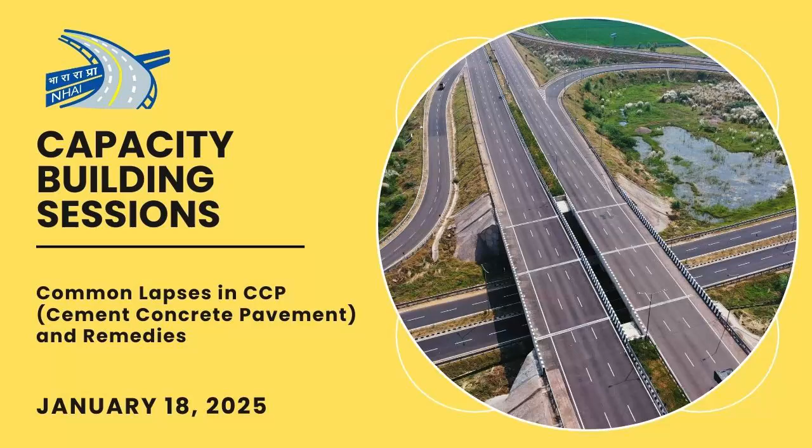This is a lecture which I framed after traveling across the country. I found some very small mistakes are being committed, and their cumulative effect, their compounding effect, is too much, so that we get a bad road.

This is a sentence I framed in 2019. IRC had a seminar on concrete roads, and before that I framed this sentence: India paves concrete ways for prosperity. I think everybody will like it.

This is a sentence written on the Highway Research Station Madras entrance. I went there in 1994 to deliver a lecture. This Highway Research Station Madras is in Guindy. This was a beautiful sentence, so I copied it.

The search for truth is in one way hard and in another way easy, for it is evident that no one can master it fully or miss it wholly. But each adds a little bit to our knowledge of nature, or we can say roads, and from all the facts assembled there arises a certain grandeur, bhavyata. So neither is each one of us an expert, nor is it that we do not know anything. It is a cumulative effect which makes a project deliverable.

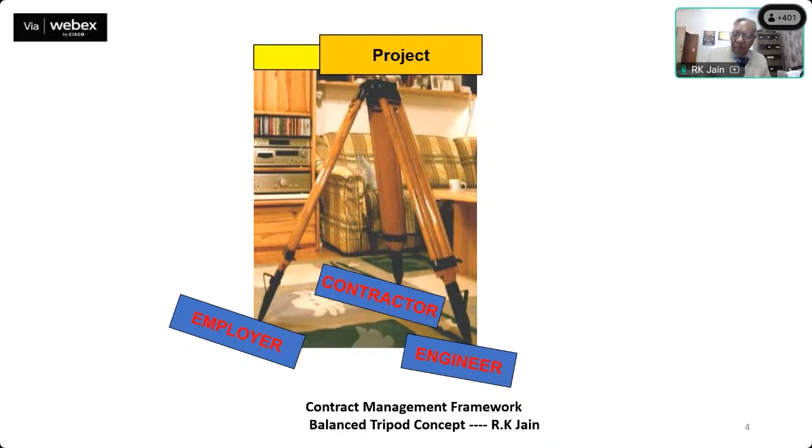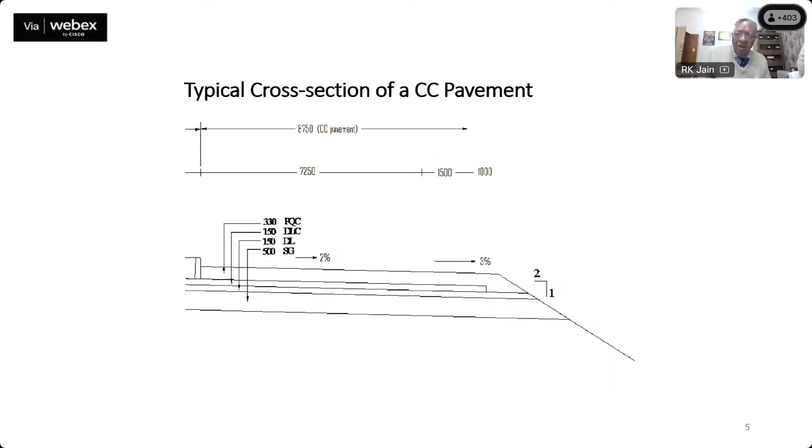See, construction of a CC pavement is construction sensitive. Utmost care has to be taken in the very beginning.

Let me add a sentence from my guru, late Dr. Raymond Sharp from UK. He used to come for the first project, Delhi Mathura Road. He used to say, Mr. Jain, this concrete pavement is like a sophisticated English lady. If you care for her in the beginning, she will serve you your whole life. Otherwise, you will serve her your whole life, meaning thereby that there will be problems and problems. So in the very beginning itself, we have to be very careful.

I attended the Chicago conference. I was sent by IRC. I was co-convener of the Rigid Pavement Committee, Mr. B.K. Sinha was the convener. Both of us were deputed to attend this LLCP, Long Life Concrete Pavement Chicago Conference, 25th to 27th October 2006. This is a sentence I picked up from one of the papers.

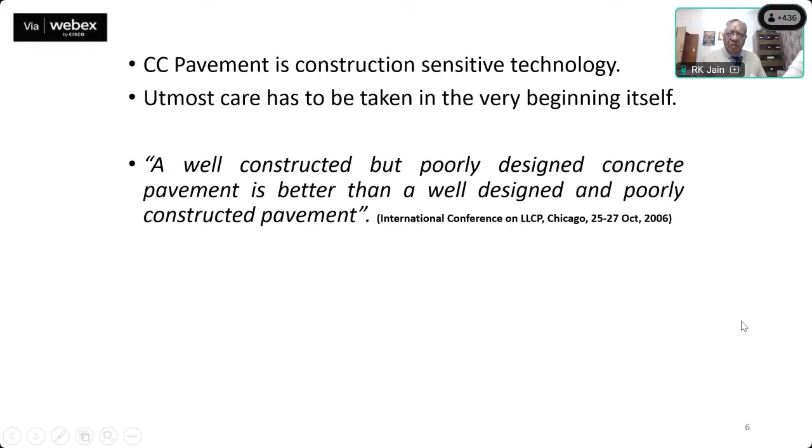This is the first lapse. Prior to that, I'll show you in another slide where do we falter. It will come.

I have seen so many designer designs say 300 thick. It should be built 310, because its life is 30 years, and I have quoted those paras. The thickness has to be increased by 10 because we have to do 2 times retexturing and then grinding to rectify the faulting during the service life.

What is faulting? Between the two slabs, there is a difference of level of more than 4mm or above. That is faulting in our country. In some countries they take it as 3, but when I wrote the specification, I decided to have 4, and that is okay.

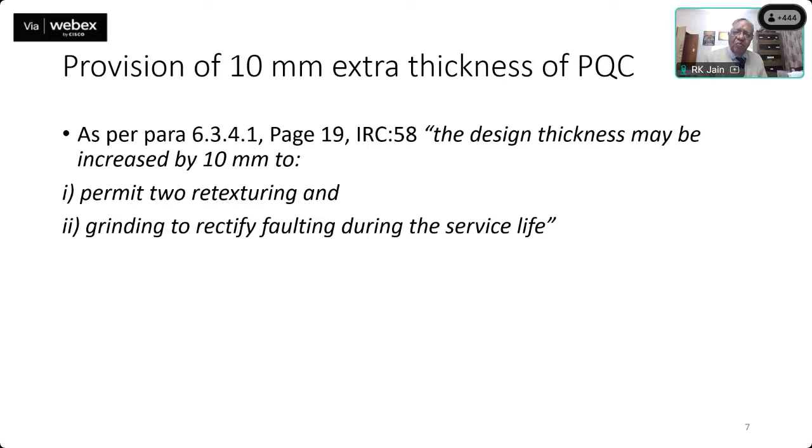Now, you see any foreign photo, you will find that all the dowel bars, all the bars in CRCP or in JPCP, the iron rods are coated with anti-corrosive coating.

This is IS 13620. It is to be applied on each dowel bar and tie bar. The provision has been made by me in IRC 15, 2017. Believe me, nobody is complying with it. Nobody is making compliance of this requirement.

Result is, we cannot prevent the entry of water through the joints or elsewhere. It will reach definitely these tie bars, and also sometimes dowel bars. You will find, if you see a photograph in IRC SP 83, I have put in a photograph from a Bihar project of NHAI. The dowel bars are all rusted, they are bent.

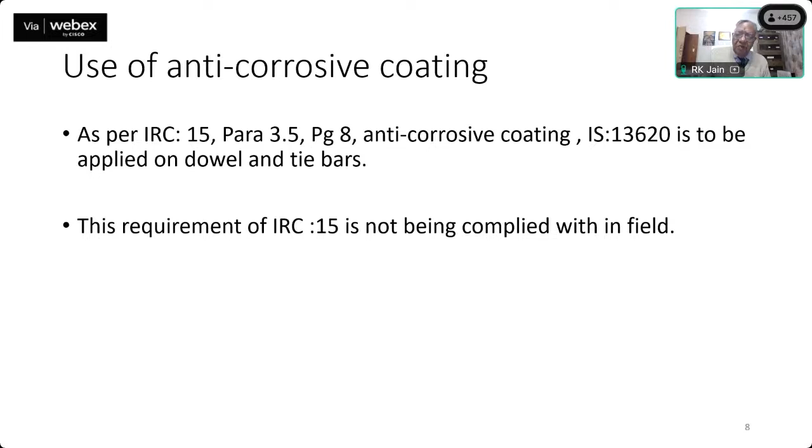We are using plasticizer when we are constructing the road to gain good workability.

While on this subject, let me define what is the role of plasticizer. The role of plasticizer is to impart the same type of charge, say positive, to each grain of cement. And when the two grains are charged with the same type, say positive, by process of mutual repulsion, we get good workability. Not by adding water, but by this.

So what should we do? It should remain constantly in an agitated state so that it is always in suspension in the water. And I have seen at many places it is not being complied with.

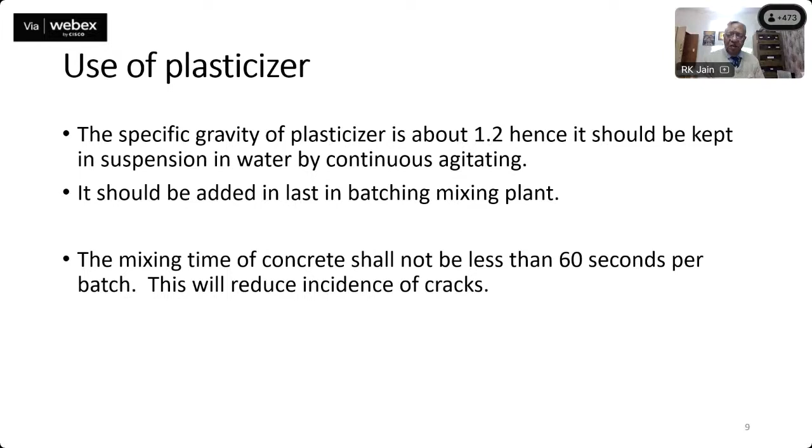Next. This I added purposely, since some of my friends will be working in hilly areas, we call it ghat. This was a very serious problem with NHAI, the ministry. This Shiradi Ghat is NH 75, old NH 48, from kilometer 237 to kilometer 263.

Mr. Oscar Fernandes, in the last UPA government, was the minister in charge, and this road happened to be in his constituency. He had a meeting of 20 persons, and in the second meeting he walked up to me with folded hands and said, Jain Sahab, I have been told you can do something. I said, okay sir, why not? Myself and Dr. Pandey, to cut the matter short, visited the site and this road was produced.

Now you see a big mobile tent. It had two functions. Will you believe, one night we paved under the tent because we had very much time constraint - only monsoon was given to us.

When you are constructing a road, the IRC 15 and other specifications provide that wind velocity should not be more than 15 km per hour. Wind is in the hands of God, not in our hand. So what do you do? Take canvas, put it about 5-10 meters away on both sides of the paver. It will cut off the speed of the wind, and there will not be undesired cracks. I will show you when we proceed how that wind affects and how we can prevent it.

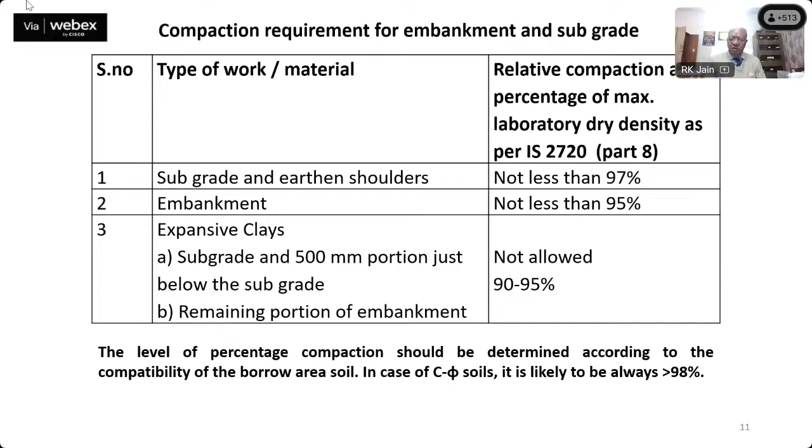So I have spent about 5 minutes on this. Kindly stick to it, and tell your AEs and EEs not to put the peg on 97% or 95% for a man. Okay, next.

The main reason why concrete cracks is improper mix design and jointing practice. Jointing practice, you delay it. The cracking is related to the inherent character of concrete - it will crack when it changes volumetrically due to moisture and thermal effects. This lower sentence is from Dr. Raymond Sharp itself: the incidence of cracks can be minimized by improving the mix design and jointing practices, with timely saw cutting and properly managed curing.

This is as such. The lower portion: there is no reason a concrete road should not serve the whole design life if cared for earnestly from design to maintenance.

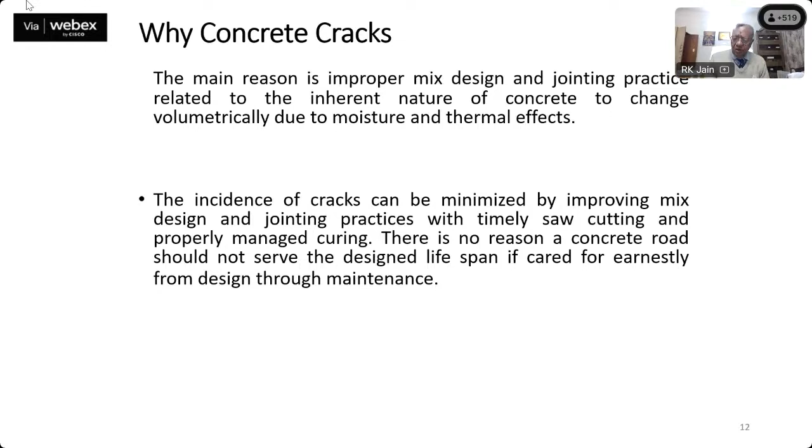So till now, it is very much relevant that our mix design should be done properly, and most importantly, the cracks, the joints - when we are making the joints, we do the initial cutting. That should be timely, otherwise it is going to be a troublesome situation.

This is from IRC SP 83. While on the subject, let me tell you, I had two lessons from Dr. Dan G. Zollinger, Texas A&M University in College Station, Texas. I was sent there through Federal Highway, on the recommendation of Federal Highway, and he taught me all this. Then he was preparing some literature for Federal Highway. I requested, and in two months I got two CDs developed from them, and then wrote this IRC SP 83, which is used so vitally in the country. Of course, I was not alone - there was a team in IRC, but I was heading that.

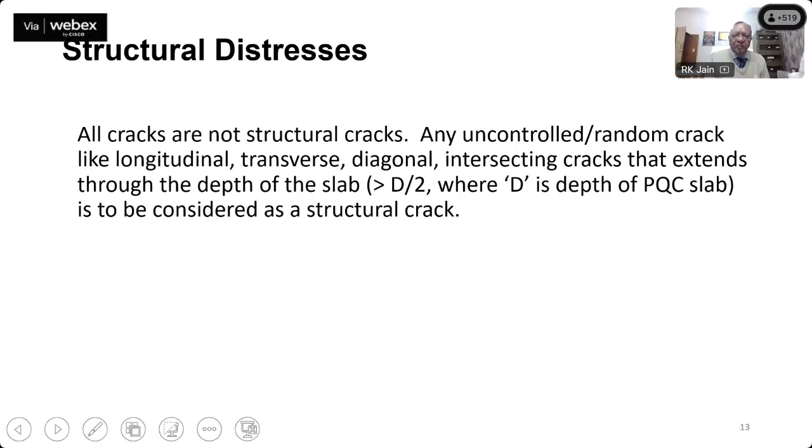This I have picked up from chapter 3 of this. There are 3 types of cracks which are prominent. Excessive drying shrinkage - how does it happen? We leave the pavement naked to sun rays, the water gets evaporated, and this drying shrinkage happens. So this is one thing.

See the loss of subgrade support - that means the disease we are suffering from, which I explained in the previous slide, subgrade and embankment are not compacted to the compactable density. Then vibrator trails caused by malfunctioning or improper adjustment of vibrators on the machine.

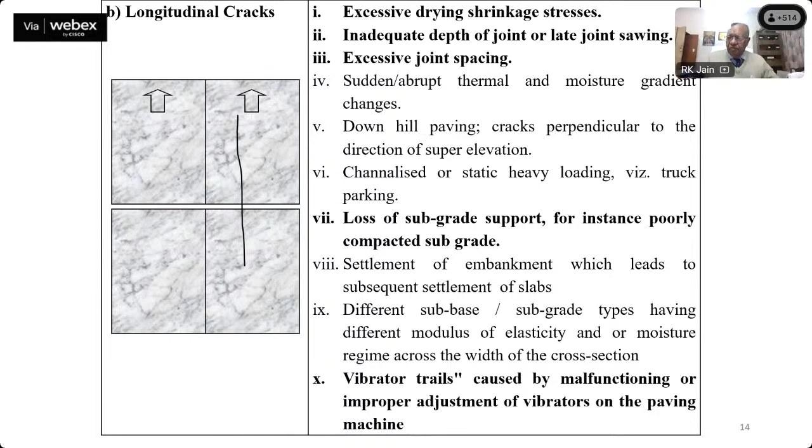Transverse cracks - same, excessive because of evaporation of surface water from the concrete. Inadequate depth: the depth for transverse is 1/3 to 1/4 of the pavement thickness. Then late initial joint groove cutting, excessive joint spacing - the ratio between length and breadth should not be more than 1.5.

For unreinforced slab, then misaligned, corroded, locked bars, dowel bars - I'll explain by figures - crack at the end of dowel bar or locking of dowel bars. Defects, delays or interruptions of...

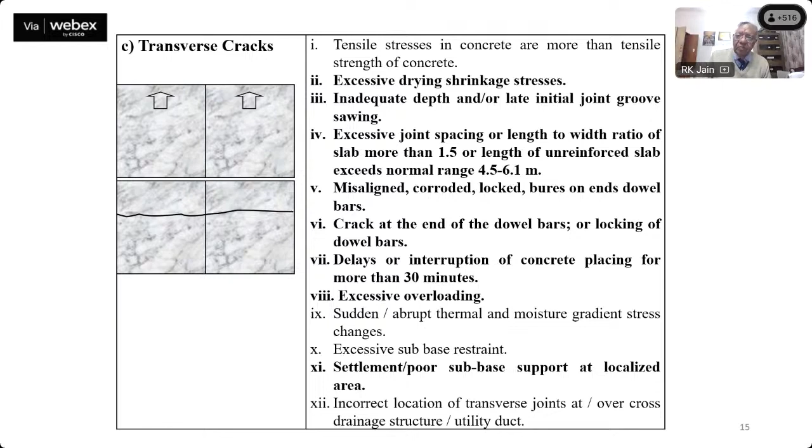Settlement - same, poor subgrade, subbase support. Diagonal cracks, they are also there, but not as much as these longitudinal cracks. Why do these longitudinal cracks happen? Poor subgrade - I'll tell you, when you go to this, I will show by pictures.

Mostly in the wheel path, and certainly in the slow lane, that is the truck lane, beside the shoulder joint, at a distance of 0.9 to 1.2 meters, that is in the wheel path, you will find a parallel crack. There are two reasons: the initial cut in the shoulder joint has not been up to 1/3 of the depth - it is less.

Government of India constituted a committee, the RK Jain committee, with myself heading it, Mr. Vidur Kant Jha and Shri MC Venkatesa. On NH 12A in Chhattisgarh, we actually saw that the depth of the shoulder joint was nowhere even 1/4, not to talk of 1/3. And the result was - it's a full report. Those who are interested, I can mail it to Jain Saab, PK Jain Saab, and he can circulate it.

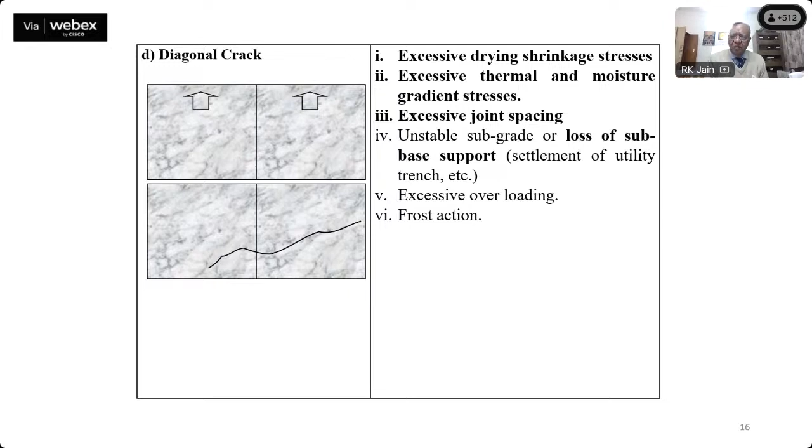Then faulting. What is faulting? Between the two slabs, either in the transverse direction or in the longitudinal direction, there is a settlement of one vis-a-vis the other, 4 millimeter or more than that. That is faulting. This also happens due to less compaction, or sometimes the tree roots also interfere.

When you do a job, give your own numbers. You can put a placard also. Tipper number 2, 3, 4, blah, blah, blah. It is easy because you have to record the slump when the tipper starts and the slump when it is discharged in front of the paver. So many places this is not being adhered to. In fact, the gentleman at the supervision site does not know the importance of it.

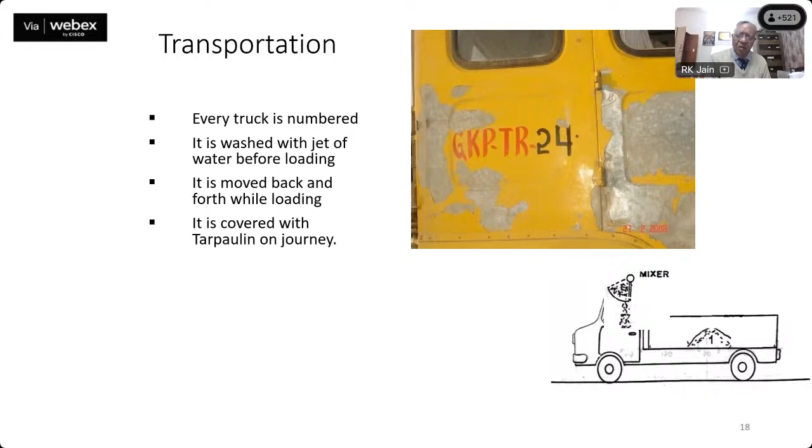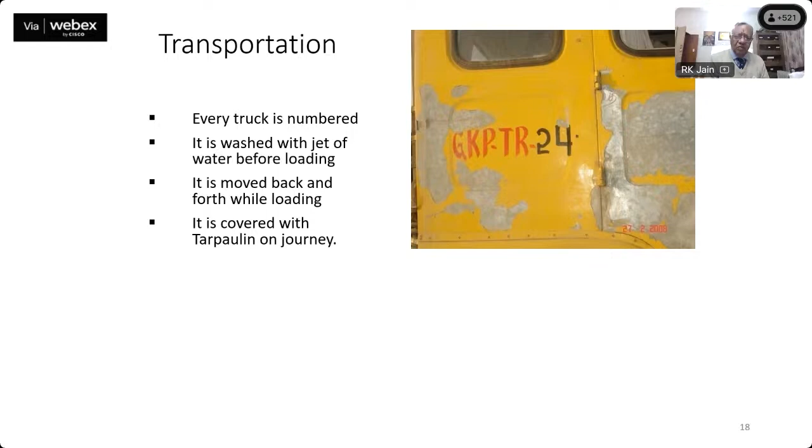We take the concrete without covering it with tarpaulin. The moisture is lost, and the concrete in the upper layer is not the same as the concrete in the lower layer of the truck. So this must be covered with tarpaulin. Very small requirement.

DLC surface we must examine. This is from a project I don't want to name. It is not closed. What will happen? When you put polythene over it, the polythene will acquire the contours of this DLC, which is before us. It is not a closed surface. What do we do? I devised a very simple technique. I'll show in the next.

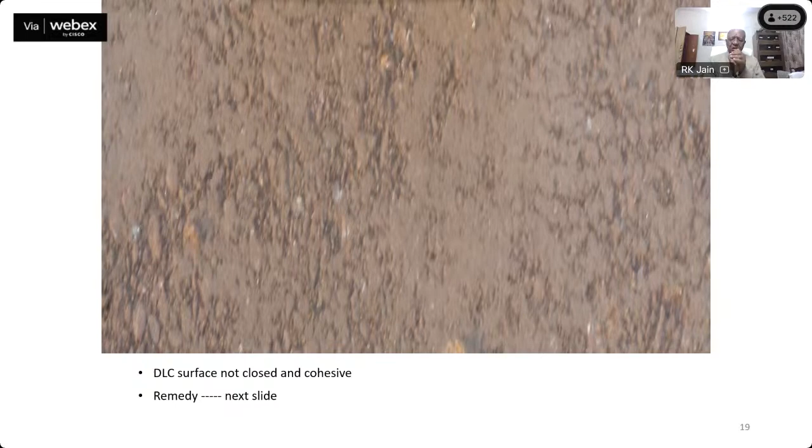Let us not forget, if the DLC is smooth, the concrete pavement will slide over it with the introduction of polythene, of course, in cyclic change of temperature and in daily change of temperature.

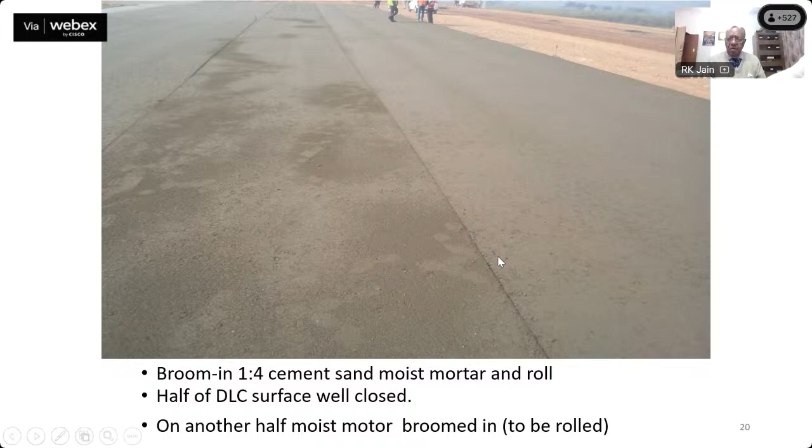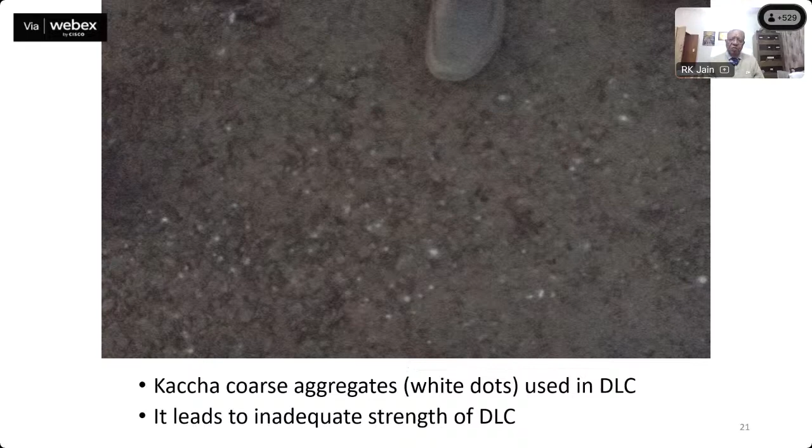Coarse aggregate white dots used in DLC. The strength of DLC was found to be less. Now see these dowel bars. There are two very important observations.

Dowel bar is cut out of a big long MS bar. Cut, tuck, tuck, tuck, tuck, tuck. There is a machine outside. If you examine the end, which has been freshly cut, you will find burrs, very small iron particles. They will be protruding along the periphery. If you put your hand, it will be cut and will bleed. So, a grinding machine should be set up at the site and these should be ground. I just want to know how many of us adhere to it. This is a very simple precaution.

And now see these dowel bars. This is here, two-thirds of it is covered, two-thirds. And in some bars, this sleeve is through, and both ends of the bar are visible. Not desirable. The end has to be closed, one end. But this is a real photo. There are so many bars in it which have the sleeve slipped to inside, and both ends are naked. And no removal of burrs. Burrs, B-U-R-R-S, burrs.

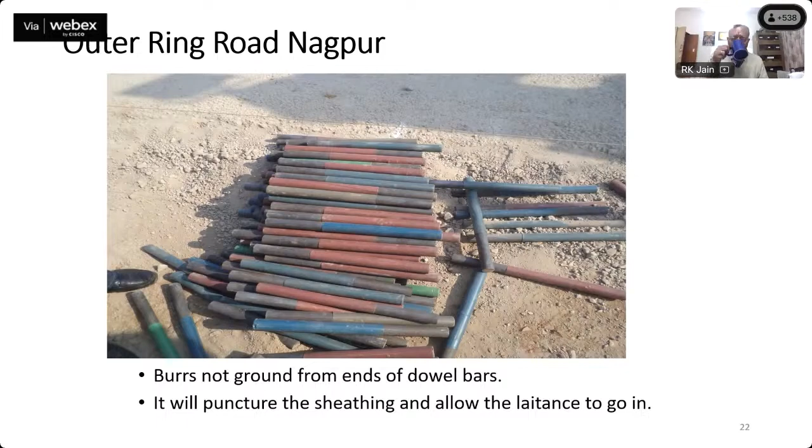Next. So what do we do?

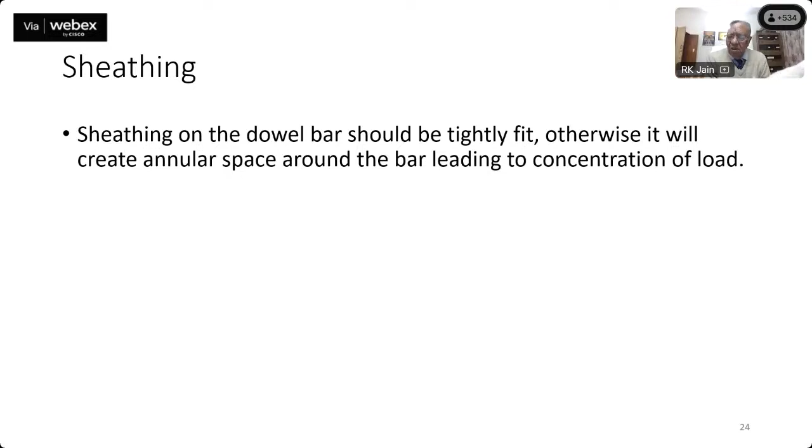Next meter. When you see, Chairman Sir was saying that it was smooth, how does it happen?

Very simple technique. You take a 3-meter straightedge, which is now 4 meter. Half of it should be put on the previous day's concrete, and the second half on the approach slab, on the approach panel, which has just been finished by slip form paver.

If there is too much difference in level, this can be corrected in the green concrete, in the nascent concrete. Once it hardens, we cannot do it.

Okay, so this is it. I hope this will improve the riding quality. The road which was shown by Honorable Chairman Sir, near Dwarka in Gujarat, this had been ensured, and there was no tuck at the joint.

Because transverse joints are only 8 to 10 mm. And when we were deciding the specifications of Delhi Mathura Road, we decided for 8 mm because the wheel will bridge over it easily, it will go without knowing. Okay.

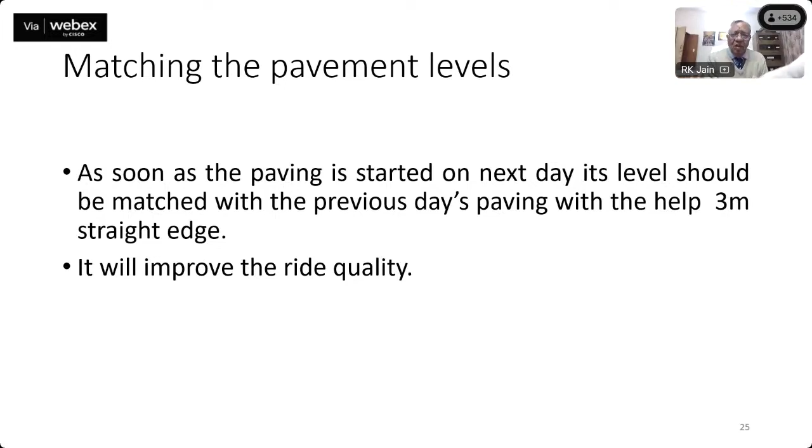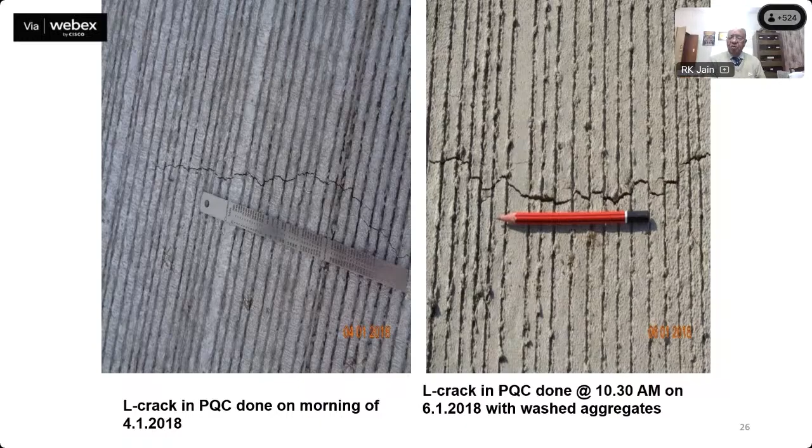I thought it is heat of hydration, they could not manage. So I got the paving stopped, and this is not it. Which one is this one?

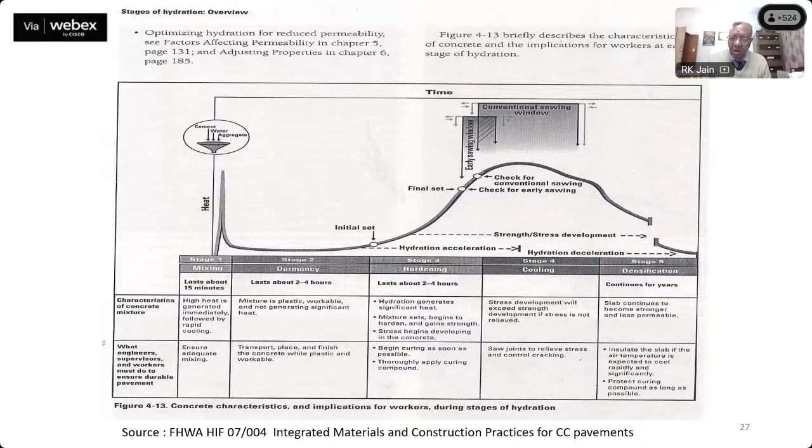Because it will not allow the internal water to be carried away by sun rays. This is done within 1.5 to 2 hours of laying.

This is done just after, or just at the terminal end of completion of initial setting time. This is it.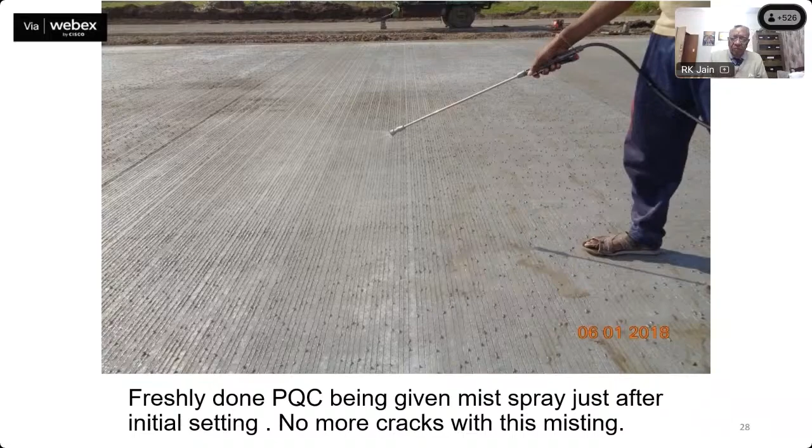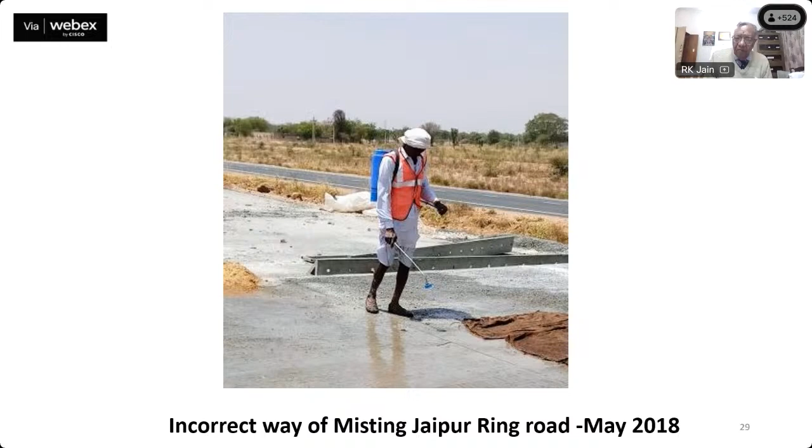This is an incorrect way because it should not be held. It should not face the concrete pavement. It should face the sky, just like this, because the water globules will break further and we will make a good mist.

This was done in May 2018. See, it is giving a sort of cover also on the PQC.

This is Samruddhi Expressway from Bombay to Nagpur. On package 3, I think I was called. It is just before Corona.

So we got a fogger design. One gentleman in Pune, he designs foggers. So I applied this technique there, and the report was that the cracks were reduced by 85 to 90%. Mr. Mayank was the PD, not he was PD of the contractor.

This fogger is working. Just see, this is going on to the road.

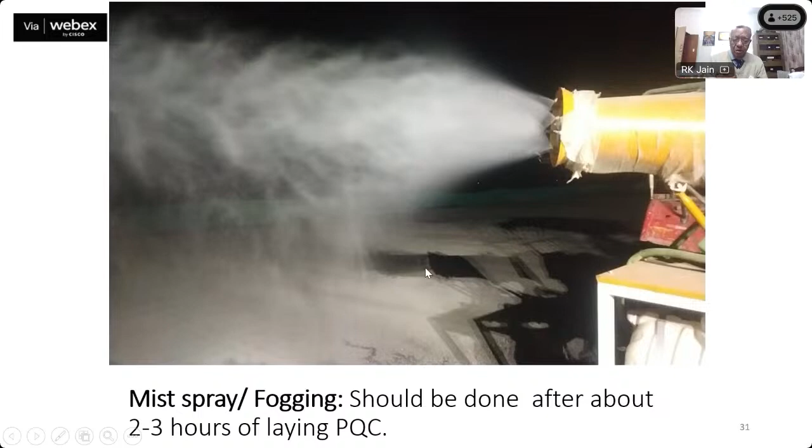We do the curing by sprinkler. It saves water, and after 2 hours or 3 hours. But see, most of them, this is poorly covered. Let's see where the cursor is there.

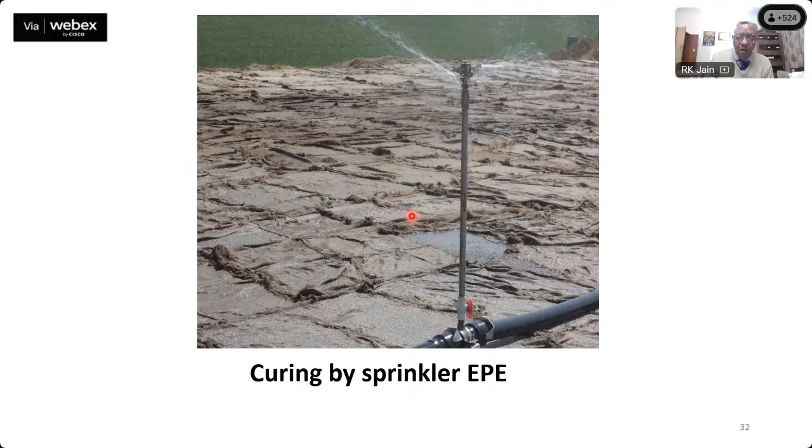This is a road leading to Hajo, old NH31, and this is beyond. You see, this crack is 0.9 to 0.92, mostly in the wheel path. This is beyond Hajo, old NH31.

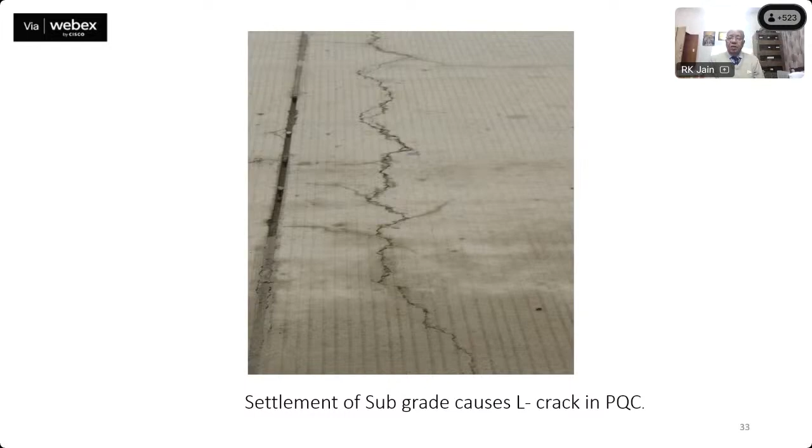What is the reason for settlement? When you see along the shoulder side, it has settled, and the shoulder joint has widened.

What is the remedy? The immediate remedy is to grind the raised portion of the PQC. This will last for 5-6 years. Ultimately, we have to mill the existing concrete, fix new material, and make up the level by micro concreting.

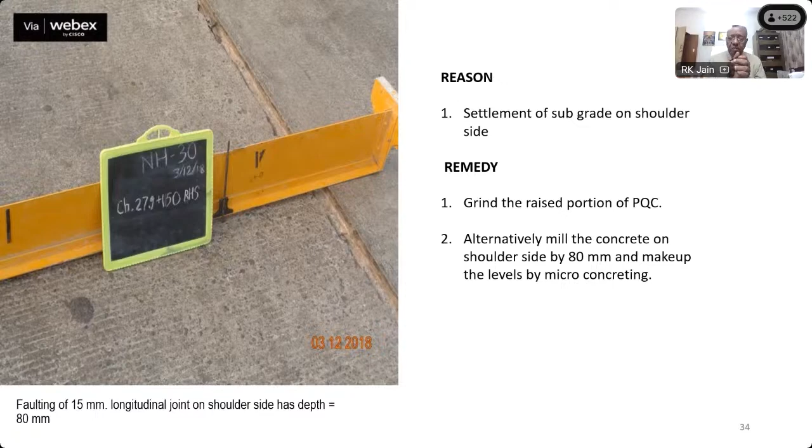Next, a very small crack, known as not even minor, 0.2 to 0.5 millimeter. This is from Lucknow. This package was near Lucknow.

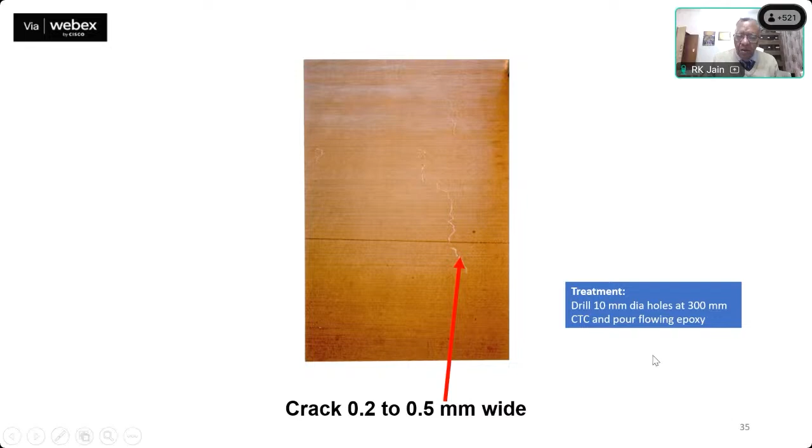Now this is from an L&T project near Balesar. This is also 0.2 to 0.5. The gentleman at the side said remove it, I said no, I was there in the DRB, this can be corrected. We just poured flowing epoxy and poured some sand over it. It is okay, still doing fine.

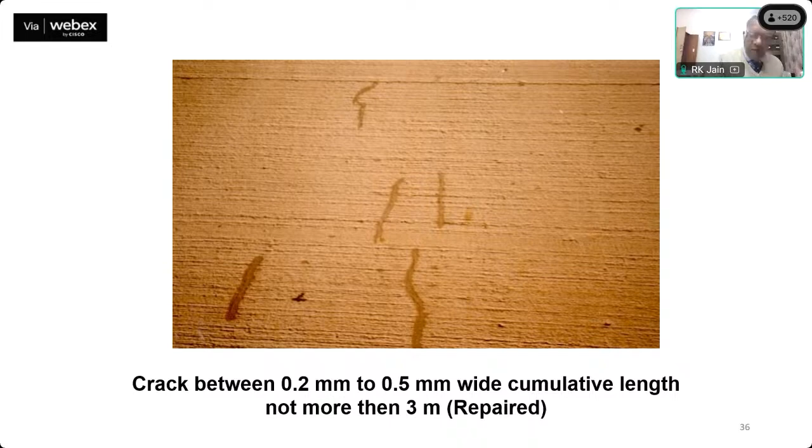This is near a sea, about maybe 5-6 kilometers away. I don't know exactly, but all these cracks are perpendicular to the direction of the wind. I submitted in the beginning that wind velocity has to be brought under control. This was not done here. Mind it, near the sea, the wind is very fast, its velocity is quite high.

So had the gentleman put in two barriers to kill the wind velocity, this situation would not have arisen. Fortunately, these cracks were small, and they were filled with flowing epoxy. I had seen this road in 2005-6 and happened to travel on it in 2016 also. They are intact as such. They look ugly but have not penetrated. So this minor precaution could have avoided this ugly scene.

This is near Daula Kuan. So many people must have traveled near Daula Kuan. You find some panels were black in color, scaling had happened. They approached me. Since the advice was free, nobody attended to it. I got a gentleman from the store and got it done. It is 1:6 epoxy sand mortar that was spread. It has lasted more than 10 years.

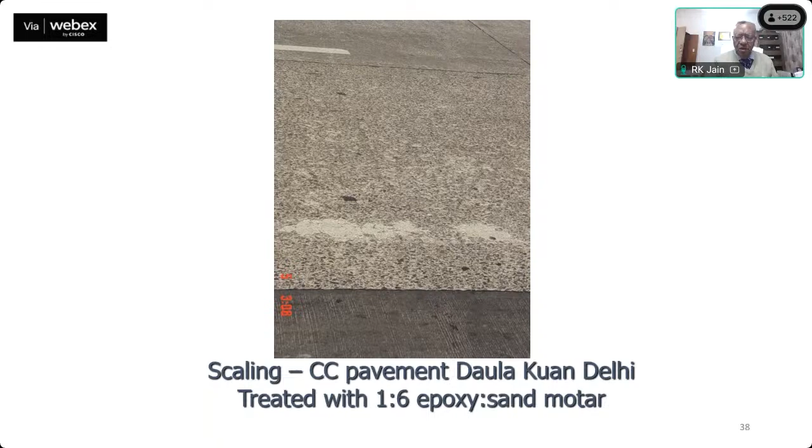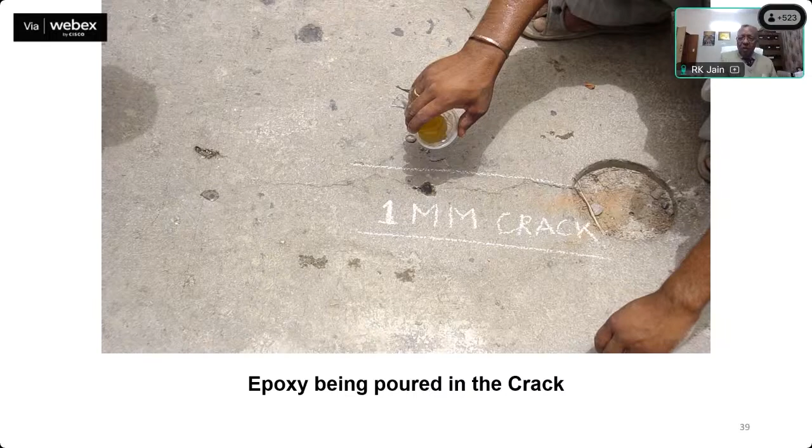In IRC 83, that is why we have seen a scale given from 1 to 5. Up to this level, do not do anything, let them stay. Similarly, these are 2 mm cracks at a 300 mm spacing.

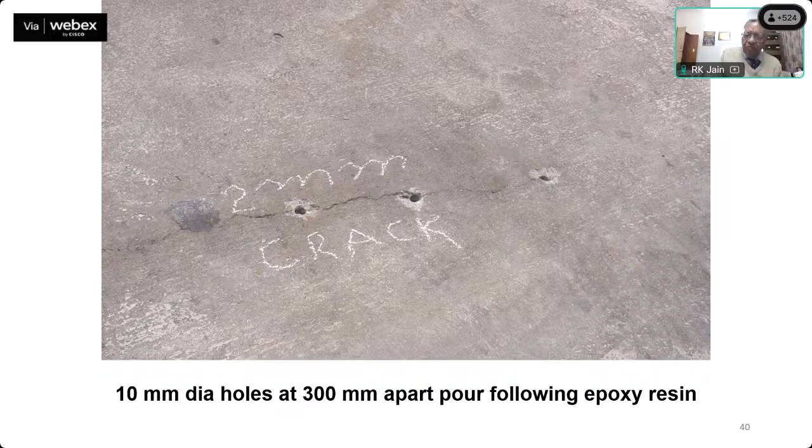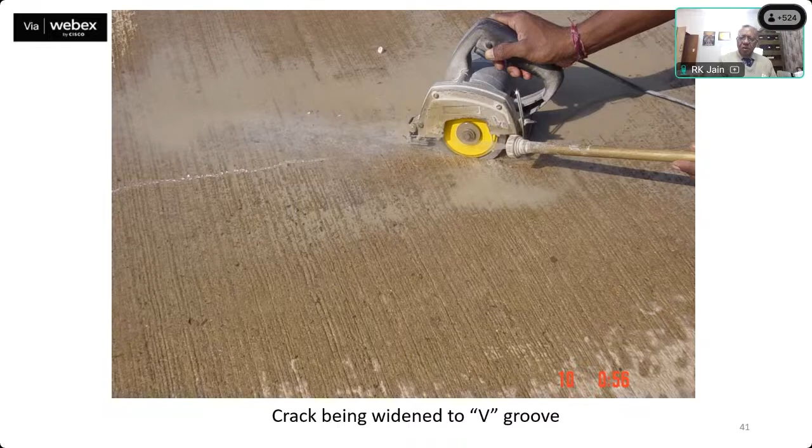People go on rejecting just for no reason. This is there, I got it done in my presence. This was a crack, make a V-groove and pour the epoxy. It will work, let's see. I am doing it with my own hand.

This is a serious problem, being neglected by field people because of lack of knowledge, with due regards to the AE. It happened with me also when I constructed this Delhi Mathura road, in a length of 0.5 kilometer. Only construction traffic when it was turned, the sealant came out, as seen here. This is package 2, Kanpur.

I was worried, so I brought a sandpaper 80 number, rubbed it, took out all the dust with the help of a bicycle pump, and then saw the instructions on the container, applied the curing, applied the priming coat. The period is half an hour to 1.5 hours, depending upon the ambient temperature.

I poured this polysulfide. Polysulfide is in 2 grades, pouring grade and gun grade. We had the pouring grade. This is of Kanpur, NHDP Kanpur, package 2. I told the contractor, why do you do this? But as I said, no. Then when it came out, he said, sir, what do I do? Now open heart surgery, what can you do? Remove it. All were removed and then sandpapered or sandblasted and redone.

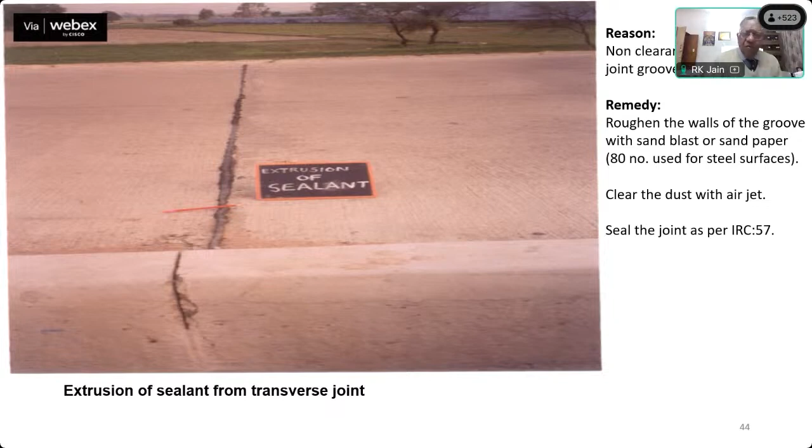This is a partial depth repair, just at the beginning of the crack. Late Dr. Sharp and myself, we are seeing it. A 4-inch deep parallel cut was made, debris were removed, the SSD condition was created, and cement concrete with 10 mm down was poured in it, properly cured. Till now, in 30 years, it is standing okay, from the last 30 years.

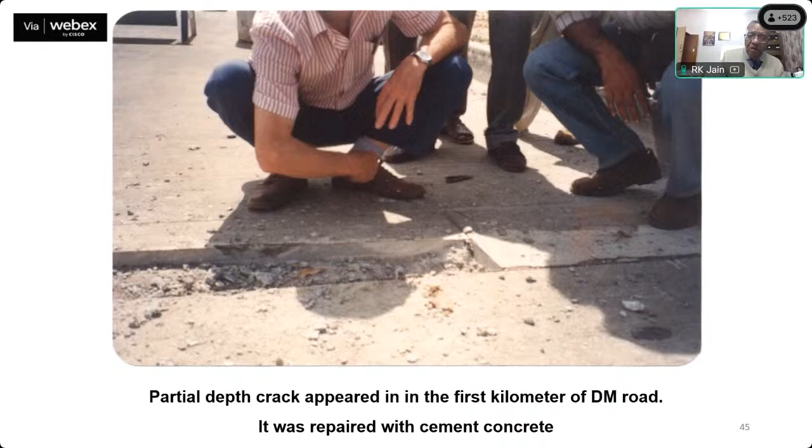There was a place, this is, I think, Delhi Mathura Road, kilometer 49.331, I remember. When it was going to be opened, I saw this crack. I was worried. See, all your consultants will say, remove the whole panel.

No. I preserved it in a width of 1 meter, broke it as shown in this picture, made 2 lines, one outside, and line 1 is deeper than line 2, so that when you break it, the impact is not passed on to the parent concrete.

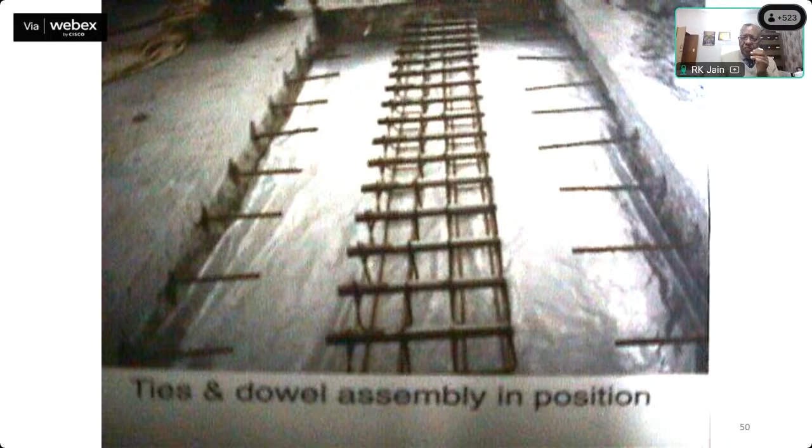And I prepared, let's see, at 300 mm, these holes, epoxy, these tie bars, and another additional transverse joint was created. Ties and dowel bars assembly were put in position, concreted it, and textured it.

30 years gone, now we cannot find out where it is. You see, 49 plus 331. So, because it is written that you must remove it, no, please treat it instead. This is acceptable. What have we done? We have rather done a better job.

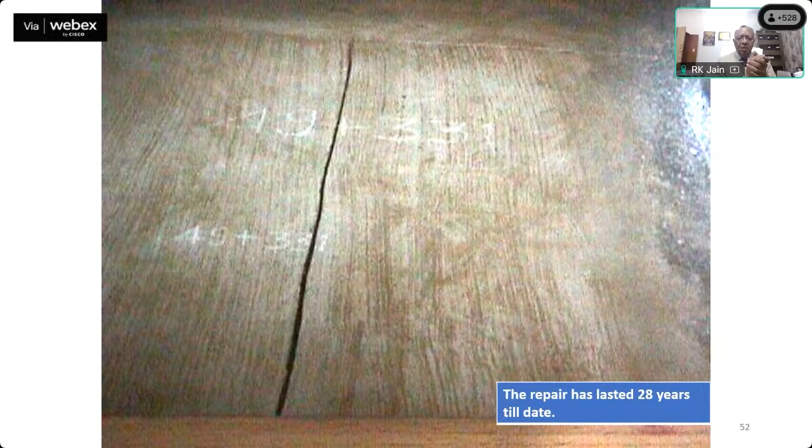This is Kanpur. Again, I was not there, Mr. Satyendra was there. The previous slab has mounted on the next slab by 4 inches. And this was broken, removed, and then manually redone. From the last about 20 years, it is okay. That is it.

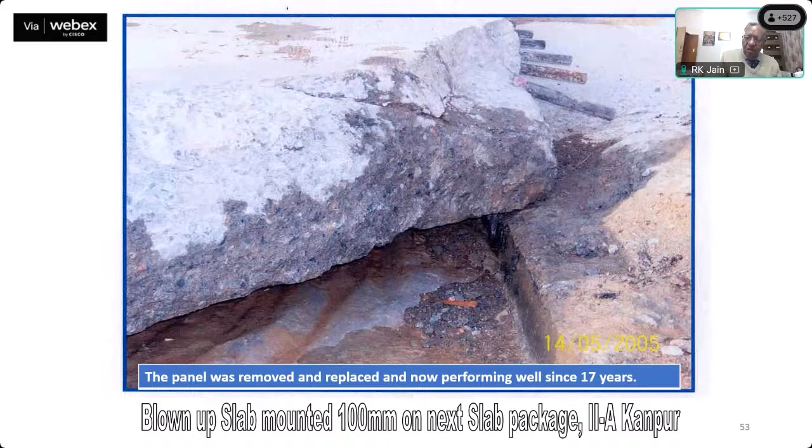Kindly see this, it's a very important picture. This is from one of the very important projects of India. Beautifully done, this sprinkling of curing compound. But see, inadequate depth of tining. What will happen with inadequate depth of tining? What will happen?

After a few years, this tining will be abraded. There will be aquaplaning or hydroplaning. What is it? A thin layer of water between the surface of the tire and surface of the road. When you apply brake, skidding will occur, and there may be multiple accidents.

In this specification, we have given the tine depth not less than 3 mm. But I can say with confidence, gentlemen, when you go to site, measure the tining depth. Nowhere in the country will you find it 3 mm. I am saying it with authenticity because I have seen it on 50 projects. I am not blaming anybody, but the codal provision and the specification must be adhered to. Otherwise, what for do we make them?

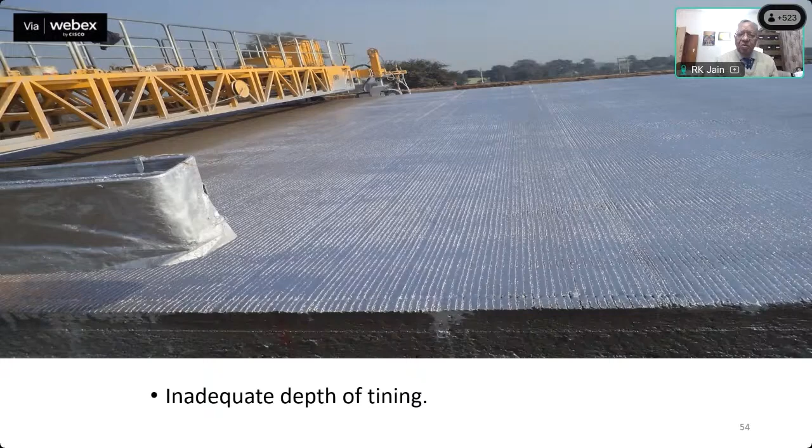This is the instrument with which the depth of tining is measured. How many of us have it at site?

Kindly see, the adequate depth is 3 to 4 mm as per MORTH 602.9.11.1 and IRC 15 para 10 point something.

I am requesting the PDs, you ask your AE to show you the tining depth. Invariably they will go in for sand patch method. Sand patch method, gentlemen, is for texturing, brush texturing, not for tining.

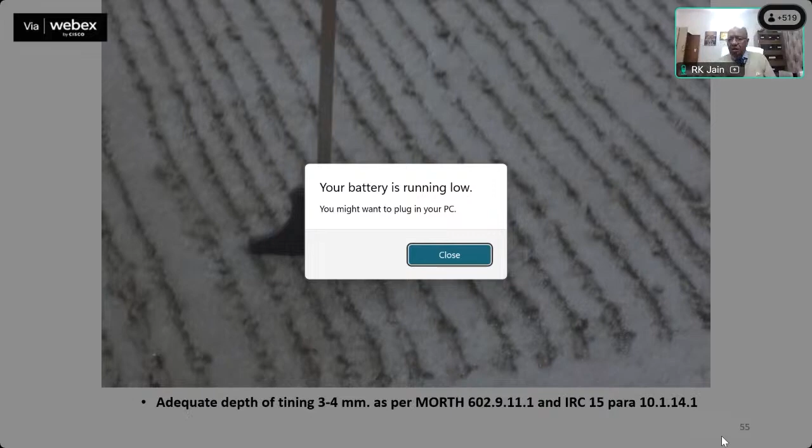Because the sand patch method is: you take 25 grams of standard sand, spread it, and take the diameter at 5 places. 31,000 divided by d square will give the depth of the texture. But nobody bothers. Unfortunate. Now, how many of us have seen it?

This is the same instrument which the tire industry takes for measuring the depth of the grooves. Very important, very small, anywhere you go. I saw it and I got it done. These pins are about 5 inches long.

So at a site I saw, I was not getting 3 millimeter depth. So I took a strip, an iron strip or some 8 mm rod, both sides, tied it with winding wire. These pins were left about 1.5 inches. The lever arm was curtailed, they become stiff, and I got 4 mm.

I again say, you show me any project where this arrangement is not there, you get even 2 mm. It may be quarter to 2, it may be sawa do also, it may be quarter past 2, but nowhere 3.5 mm or 4 mm.

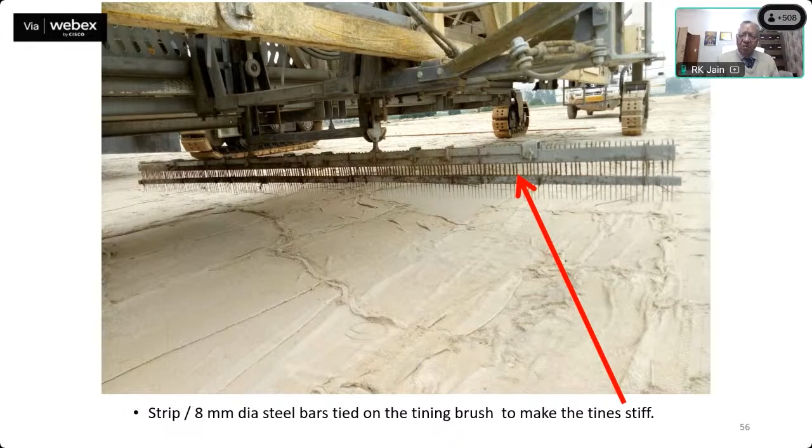Why do we insist upon it? Because it avoids accidents. It prevents skid, it is an anti-skid measure. When you apply brake, the vehicle stops. Otherwise, there are multiple accidents.

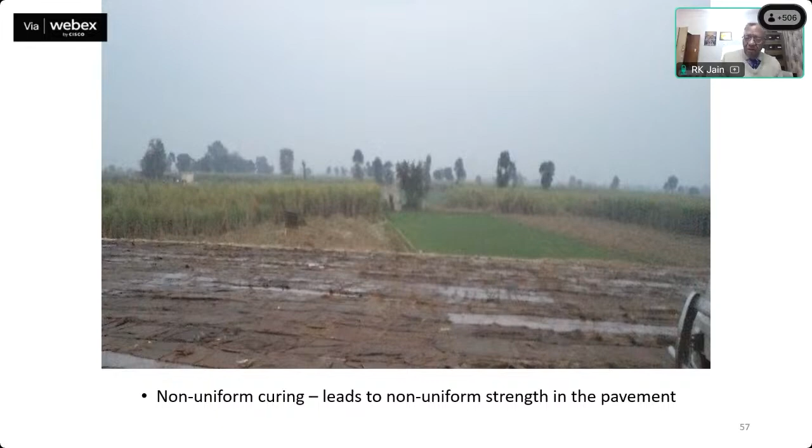Somewhere it is covered, somewhere it is not covered. We have heard of differential settlement; here it is a case of differential curing. Differential curing. Dowel bar misalignment.

I call the gentleman from Germany, MIT scan, a beautiful instrument. It can tell you the position of dowel bar and also of tie bar. Tie bar is not important, dowel bar is important. You see this. In 1 minute, it can do one joint.

And on a project we show, the marking should be with red paint on both sides. At a project, it was only one side. I said, we will measure it again with a tape. And the difference was 90 mm, 90 mm. The dowel bar was not centrally placed.

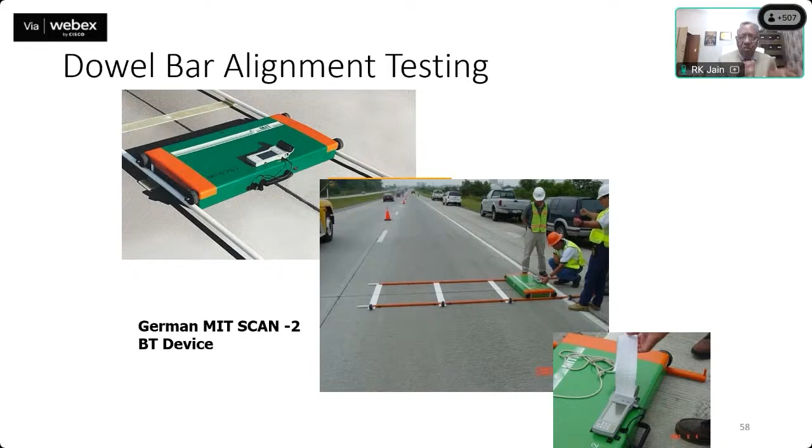I got a phone call from IIT Madras, one of my students of course. Sir, if the slump is more, what will happen to the dowel bar? I said, you take a dowel bar, it is 8 to 10 kilo, see it sinking, it is pushed to mid depth. If it sinks and goes to the bottom side, where is the load transfer?

Your LTE will decrease, load transfer efficiency. That is why we keep the slump 20 to 30, at the most 35. If the slump is more, the dowel bar will sink.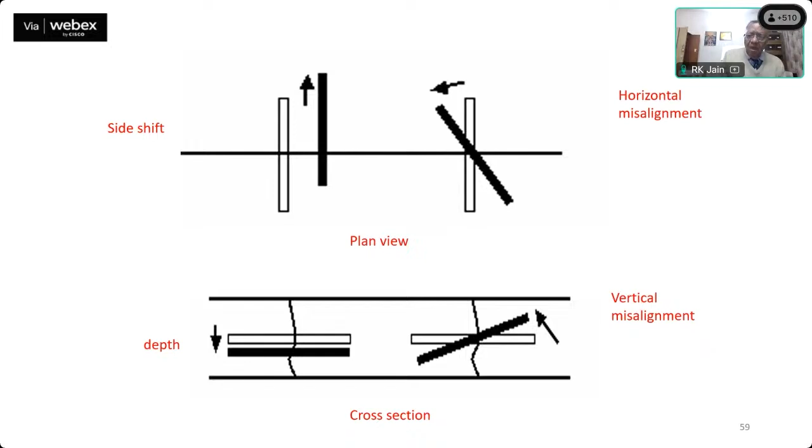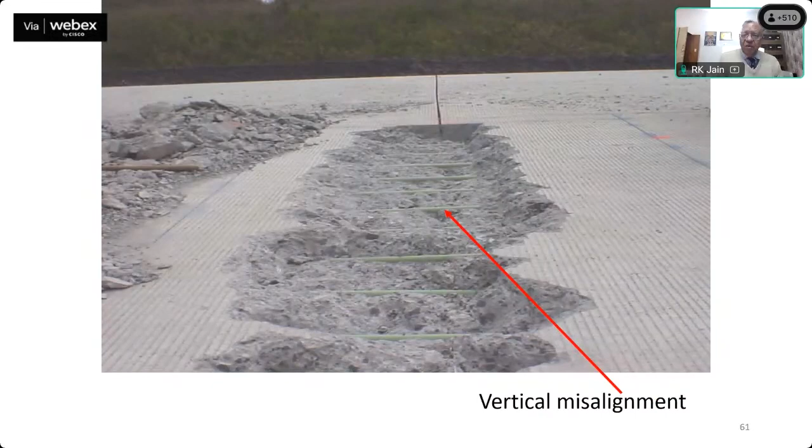This is the position, horizontal misalignment, from the same paper. Vertical misalignment, this rod has got itself lifted. Side shift, it should be 225 on each side; one side it is 113, other side it is something 337.

How will the load transfer take place? When the wheel of the truck traverses from the leave slab to the approach slab, in the approach slab the dowel bar length is only 113, whereas in the leave slab it is 337. How will the load transfer occur equally? No. So this is it.

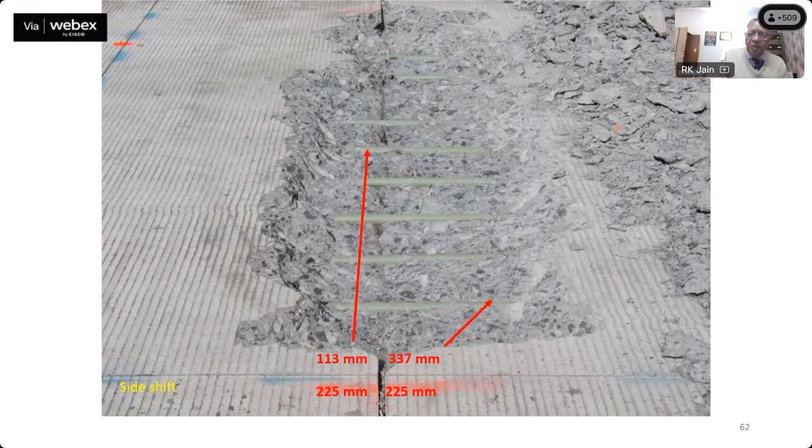Gentlemen, every fourth year I go to USA to read a paper. Now I was in Minnesota in August, along with Dr. S.S. Pawar, my colleague, and we read our paper. And then the gentleman, Mr. Tom Burnham, he took us to the MnROAD site, Minnesota roadside, where they conduct experiments.

Different thicknesses, different configurations, two types of sensors - temperature sensor and load sensor - inserted. We also saw the improved version of this MIT scan. This is available in India with SI, a company in Hyderabad called SI International or something similar. You tell them the size of your dowel bar and the diameter, and they will calibrate the machine, do the job for you, and tell you how many bars are out of tolerance and how many are within the tolerance limits. Tell me if anybody has done it.

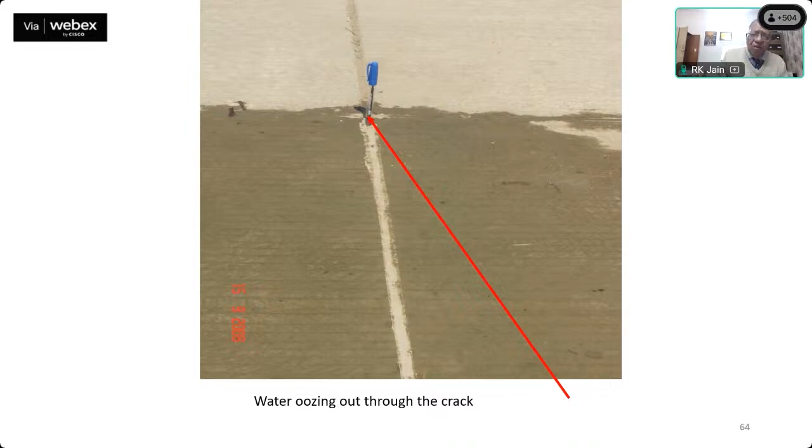Perhaps the only photograph like this in the whole world. Why did it happen? Very small reason - the median, I omitted that, the median was not earthed, it rained and the median filled with water, and this traveled like this. So never leave the median unearthed, please put earth in it. You know it is compacted to 85% Proctor density, not 97 or above, so this water will not accumulate in it and will not cause this sort of problem.

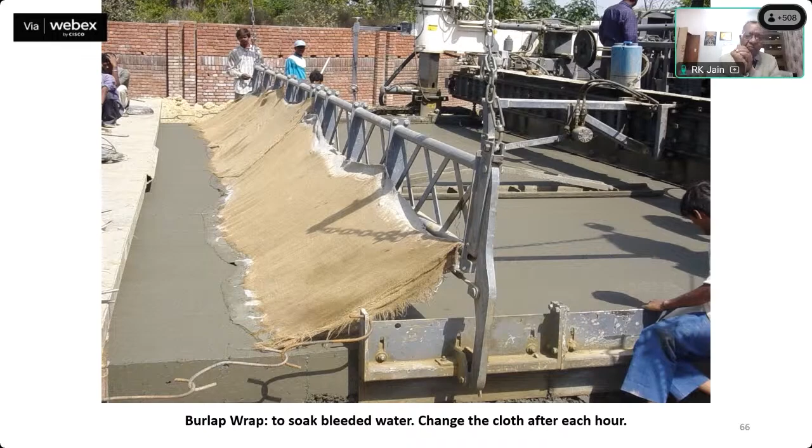Very small issue, I will not name the project. This Hessian cloth - I asked, when do you do it? Oh sir, we are very essential, we put it in place in the morning and remove it in the evening. This is doing no good. This is fully wet. The purpose of this Hessian cloth is to soak the bleeded water.

What is bleeded water? We heard of bleeding in flexible pavement. Here bleeded water happens when you mix plasticizer. The plasticizer dies after 1 hour, its water comes out and comes onto the surface, and if you touch it with your fingers, it will feel soapy. The purpose of this Hessian cloth tied to this system is to soak and absorb that bleeded water.

If it remains wet, how will it do its function? So it has to be changed as soon as it becomes half wet - wash it in a bucket of water, and in the meantime put another one in its place. So you should have 6-7 sets of it. Very simple, but not being practiced. There is no technique in it, there is no such formula, but unfortunately it has to be changed as soon as it becomes wet.

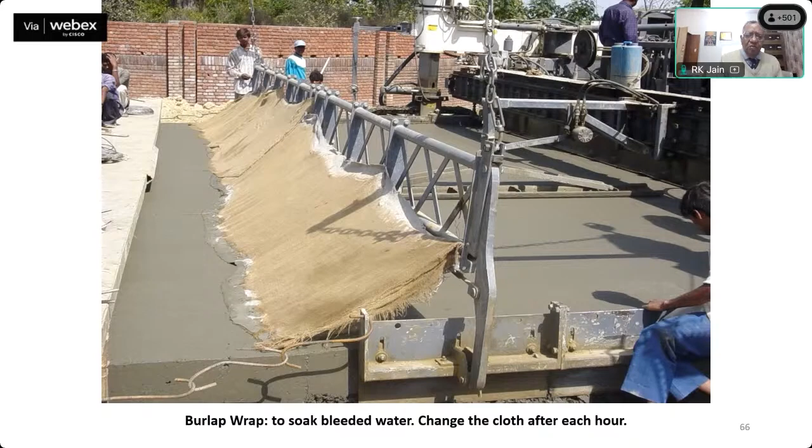Another disaster happening in our country. You kindly see, this is a roll - I call it laitance. It is not the same concrete which is manufactured in the batching and mixing plant and transported to site, no it is not. It is a roll, I loosely call it laitance - although it is not truly laitance, it is the nearest word. See these are the cavities, these are the forks which lift the dowel bar and put it in place.

And these cavities are getting filled with this laitance. Gentlemen, this is not concrete. Some Indian engineers are trying to put concrete in - just see, they are filling these cavities with the nascent concrete collected from in front of the paver. But this fellow is in danger because behind him is this oscillating beam - quite a dangerous situation they are trying to avoid.

So seeing this, I sent this photograph with a note to Wirtgen, Germany. I said in my country more than 500 of your pavers are working, why don't you solve this problem? Because at every point, after say whatever the spacing of these dowel bars, maybe 300-350 mm, you get a cavity, and this cavity is filled not with concrete but with laitance, rendering the concrete weak.

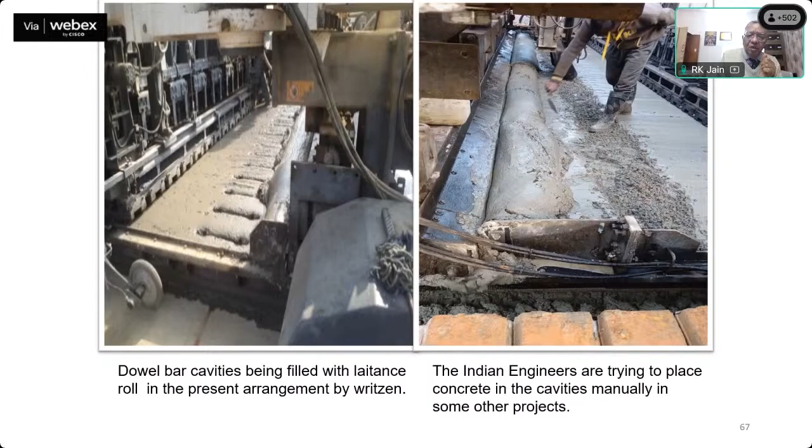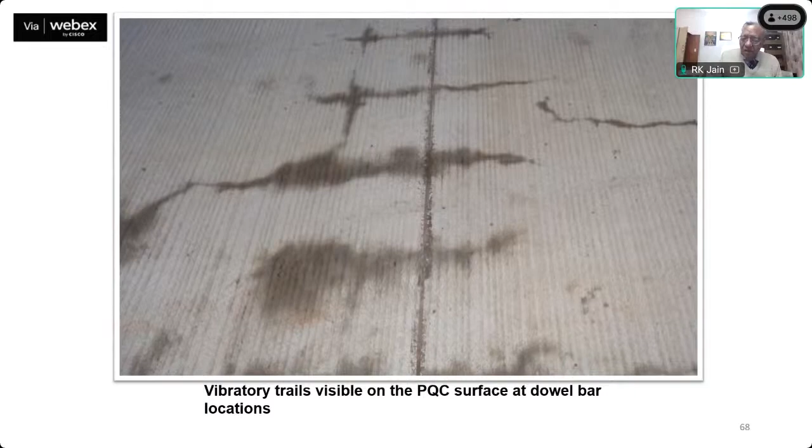Now how do I say it? Just as I described, I took 6-7 kilos of this, washed it, dried it, and measured compressive strength. It is supposed to be M40 concrete, so it is supposed to be minimum 43 as per IS 2000, chapter 16, para 2. The strength of the cube from the laitance was 39.23.

So I found it out, and this is correct—I got the slide corrected yesterday. The loss of compressive strength was 8.77%, say 9%. Similarly, from the flexural beam, the loss was 9.92%.

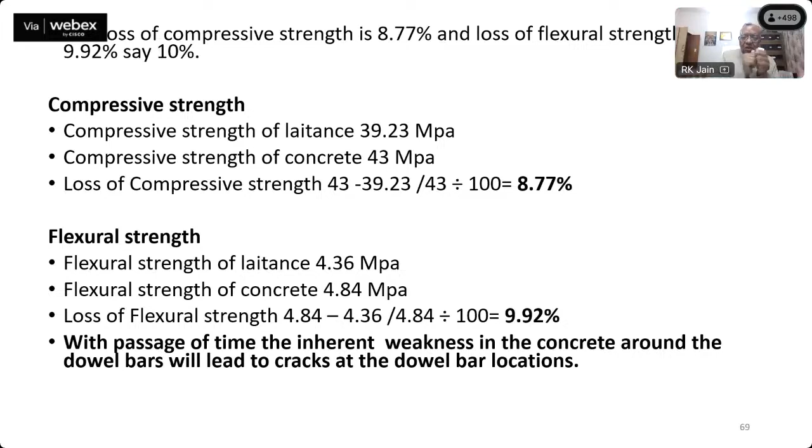With passage of time, the inherent weakness of concrete around the dowel bar will lead to cracks at the dowel bar locations. This is happening, this has happened—see how. Sorry, in between the Shiradi Ghat has come. Very interesting—those who are in the south, or who happen to go to kilometer 237 to 263, this was the condition of the road.

I got sentimental. One young couple with a small baby in their arms was trying to negotiate it—there were all pebbles, they could not. So I called some persons and we pushed the car. Believe me, gentlemen, I sat on the road and said, RK Jain, what are you here for, if you can't solve it?

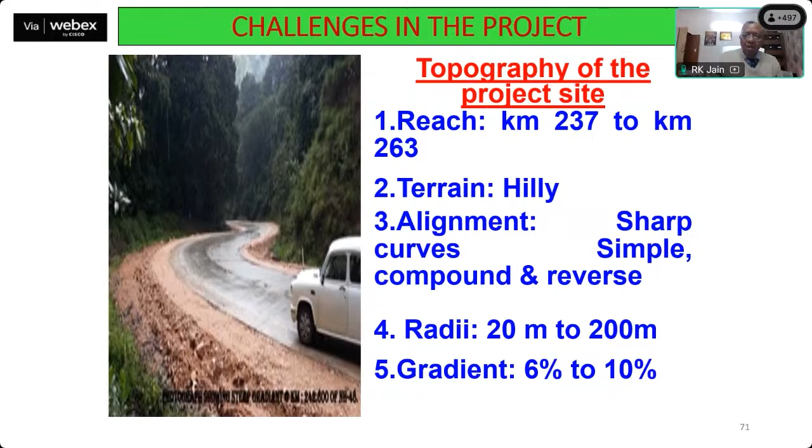Now tell us, putting hand on heart, how many of us—how many of our consultants, PDs, ROs, authority engineers, or site engineers—adhere to it? Not many.

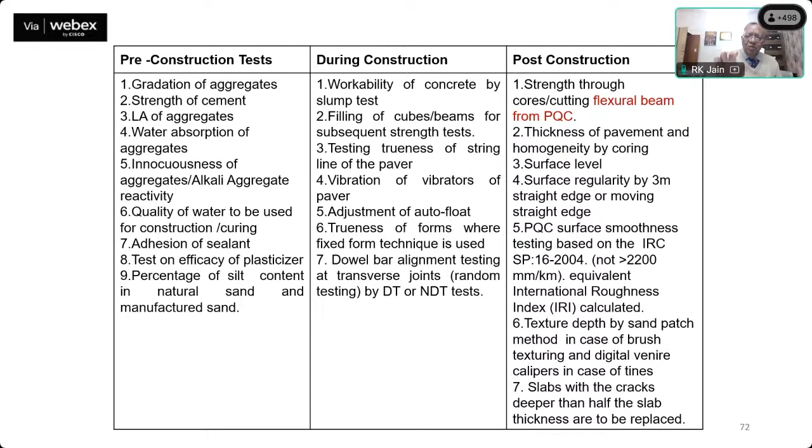But it has to be modulated according to the requirement of your project—this is indicative. Thus, in any project which has failed, please take the flexible approach.

The core test, I do not agree with. Reason? Kindly go through IS 516, fourth edition. I did not know this initially, I came to know subsequently. The Minister of Transport constituted the R.K. Jain committee.

Members were Mr. M.C. Venkatesa, who has experience working on concrete roads in 11 countries, and our friend Vidur Kanja, who now handles new technologies in the ministry. We stayed there for 4 days. From the dismantled portion, I got this cut to size and tested them.

Because I should verify before that the concrete is okay. The concrete was found to be okay. I got them tested in a private laboratory in my presence. The chainage, etc. is written there.

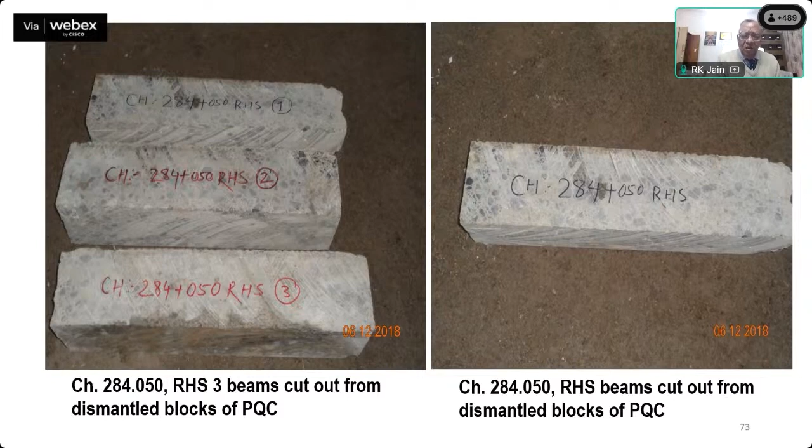This I remember correctly - the requirement was 4.84, and this is a direct test and an assured tool of quality control. I want to propagate it because at most places we are getting it wrong. I will show you how and why.

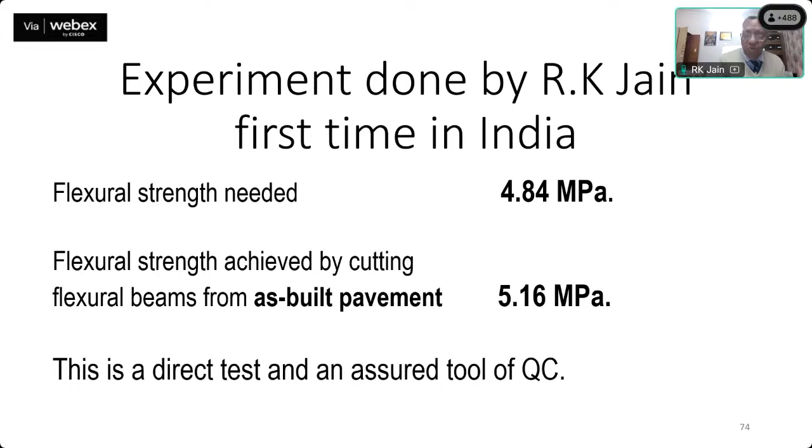On the last day, the 27th, they put a mic and said anybody who will raise a question, the gentleman who will reply should go to the mic and reply. How to achieve excellent quality? So I also raised my hand. They said, yes, Mr. Jain from India.

I went to the mic and said, look, to achieve quality, one has to become a quality person. What is a quality person? He or she must be very knowledgeable on the subject, must be very dedicated also, and must have a Himalayan attitude and determination for implementation of the quality plan given in the contract. The quality will follow.

Before I could leave the mic, 2 gentlemen from the USA who had visited this project said, okay, those who have doubt, they can see the Delhi Mathura Road - they could not even say it properly, Mathura, Delhi Mathura Road. We have seen it. This is a mantra which I gave in the Chicago conference, and I give it everywhere.

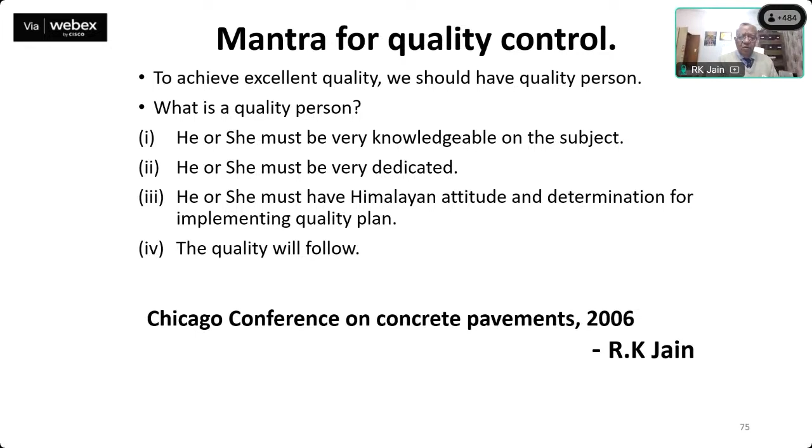So my time is over. This is...